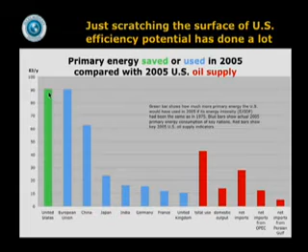In fact, it was also over twice our use of oil. It was about 6 times our oil output or our net imports from OPEC, and it was 13 times our net oil imports from the Persian Gulf. So if we hadn't done that reduction in energy intensity, the world would have been a whole lot worse.

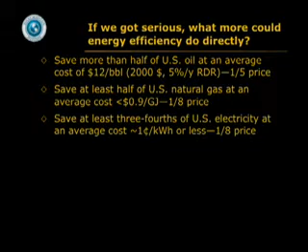And if we got serious, we could, with further technical improvements in end-use energy efficiency, save over half our oil for $12 a barrel, roughly a fifth the recent price, save at least half our gas at under $1 a gigajoule, roughly an eighth the recent price, save at least 3/4 of our electricity at about an eighth the typical price. It's in fact cheaper to do that than just to run a coal or nuclear plant, even if building it costs nothing. We would correspondingly, of course, increase how much we could do with any kind of alternative supply.

We would prolong cheaper options for supply, delay costlier ones. That is, in any form of supply, we'd stay on the lower, easier part of the supply curves. We'd rebalance supply and demand nicely, reduce volatility, gain spare capacity in case of supply interruptions. But indirectly, we'd have some other big benefits. We'd cut and stabilize fuel prices, especially for world oil, but also for gas.

For example, I mentioned 2 nights ago that saving 1% of U.S. electricity, including peak hours, would cut natural gas use by 2% and its price by 3 or 4%. Certainly, any even expectation that the U.S. is about to save oil will soften expected oil demand and price with big benefits, especially for the poor countries that are most stressed by high oil prices, and also big benefits for stability.

It is no accident that with isolated exceptions like Bahrain, the Arab countries that don't have oil have had more development success than the Arab countries that did have oil. We would get better energy services, and that extra value is worth a lot more than the saved energy cost. We would have a richer world, more fairly distributed, and by free market choices, we could, as I'll describe next, solve the oil, climate, and largely proliferation problems, all led by business for profit.

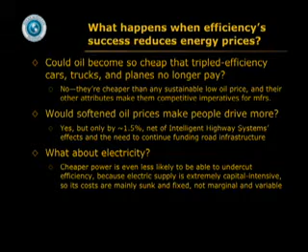Would people drive more when oil gets cheaper because we buy less of it? Well, yeah, but it's a small effect. We figure net it's about 1.5%. What about electricity? Well, cheaper power is even less likely to undercut efficiency because most of the price of electricity is a fixed cost from its extreme capital intensity, and that's already paid for. Not so much of the price of electricity varies if you use less of it.

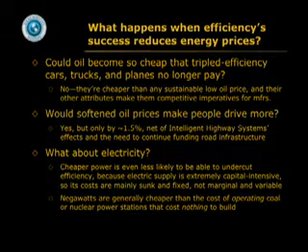And in general, it's cheaper to save electricity than to run a thermal power plant. It really doesn't matter how many of them you have. If it's cheaper not to run them, you shouldn't run them regardless of your capacity position. So these kinds of reequilibration effects in the economy are real, but they're small, and they won't change the outcome that efficiency is still a great buy and will beat supply.

So this suggests that the energy future is not going to be business as usual. On the whole, I think energy prices will become less important. Energy will become less predictable using economic tools and perspectives. And our major energy institutions will become less important to have. Capital is going to move a lot faster, as in many other areas of the economy. The emphasis will also shift from commodities to services, and an economically efficient carbon market will clear at very low prices. In principle, it should indeed clear at negative prices because you can do all of the climate stabilization you need if you really get good at it just with energy efficiency that's cheaper than the fuel it saves.

And the outcomes are going to end up being driven more by the convergence of disruptive technologies and by innovations in competitive strategy than by new public policies, which will always be playing catch-up. Wholly new sources of energy are also possible, and there may be physics we haven't discovered yet, but even without that, just discontinuities and surprises are going to speed up. And also, probably some very bad things will happen.

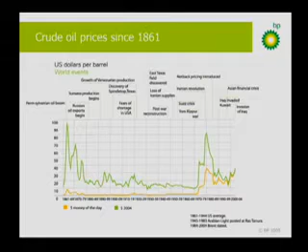What happened was that in 1981, President Reagan came into office believing that the country needed huge expansions of the kinds of big, slow, costly supplies that had not been competing very well in the market. So he greased the regulatory skids, put in huge subsidies, and started to get a big expansion coming online of coal and nuclear and frontier oil and gas, except he didn't notice that meanwhile the market was quietly producing a gusher of efficiency under the twin influence of the Carter-era efficiency-oriented policies that were still working their way through and the 79 second oil shock.

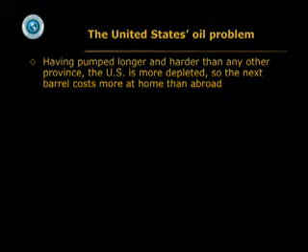Now, the U.S. oil problem is, in essence, very simple. We've simply been pumping oil longer and harder than any other province on Earth, so we're more depleted. So the next barrel costs more at home than it does abroad. And in a market economy, there are only three solutions. Their right names, which are seldom used, are protectionism, trade, and substitution.

Protectionism means that you tax imported oil or subsidize domestic oil or both to distort their relative price so you don't notice that the imported stuff is cheaper. Because the market says buy the cheapest first, politics domestically tends to say buy the nearest first, politics often wins. Of course, it's a little hard to see how you solve the problem of domestic depletion by depleting faster, or as Dave Brower said, strength through exhaustion. And it's particularly dumb to subsidize domestic oil because that also suppresses its efficient use. But we've been doing a lot of that.

Now, trade is another alternative. It just means you unsentimentally buy in world markets oil wherever it's cheapest, just as our competitors do. And you diversify supplies, you stockpile, you cultivate good foreign relations, trade relations, and countries like Japan and Germany that have no oil, of course, are very good at buying it and earning the money to pay for it.

A third option is substitution, and that's really what I've been lecturing about here all week. That's how to do the same tasks by cheaper means than oil, and that offers all of the strategically important plays. The rest are much less interesting and give much less kind of disruptive competitive advantage at the level of the firm or the nation.

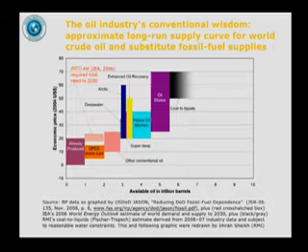Now, just for fun, I spliced into this graph another 3 trillion barrels of oil substitutions from the demand and supply sides that we worked out for the United States in Winning the Oil Endgame, and I reported to you on Wednesday night. And notice how everything suddenly slides to the right when you add those 3 green blocks of substituting some saved natural gas, but not accounting for quite a lot of it. This only counts about a third of it. Doubling end-use efficiency, and advanced biofuels.

And you notice that that makes this very carbon-intensive, expensive stuff slip off very far into the future, and you probably never get there because you're all on renewables by then. So that's one of the examples of why buying time is valuable. And obviously your competitive posture and your investment strategy will be very different if you see that world than if you see this world. So it's important to pay attention to all the competitors in the landscape.

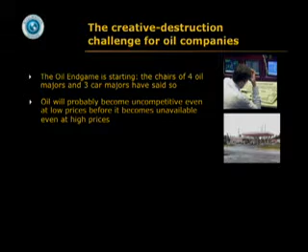Now, the challenge for oil companies is Schumpeterian creative destruction, and the chairs of at least 4 oil majors and 3 car majors have already said that we're starting the oil endgame, and many have added the beginning of the hydrogen era. And I think it's clear to many in the industry that oil is probably going to get uncompetitive even at low prices before it becomes unavailable even at high prices. Or as Sheikh Yamani and others have famously said, the Stone Age didn't end because the world ran out of stones, and the oil age won't end because the world runs out of oil.

Of course, there are important transitional product lines as biofuels are being used in Europe, and there are compelling arguments for switching your business model to providing mobility and access which customers want rather than selling liters, or for the auto industry, selling cars, and to do that before someone does it to you. The most interesting thing, though, that surprised many when we first pointed it out is that if you own a lot of hydrocarbons in the ground, you'll probably make more money even in a world that buys no oil.

And the reason for that is that in general, because you can use hydrogen so much more efficiently than oil, you will make more money out of the hydrogen without the carbon than with the carbon, even if nobody pays you to take carbon out of the air. To put it another way, you'll make more money taking hydrogen out of your hydrocarbons in a reformer than putting more in a refinery. So in a world that is taking this journey beyond oil, your oil asset values may actually be sustained or increased.

Now, let me switch to climate and ask you, how is climate protection like the Hubble Space Telescope?

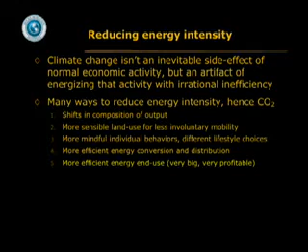Of course, there are many ways to reduce energy intensity once you realize that climate change is not an inevitable side effect of normal economic activity, but just an artifact of energizing the activity in a way that loses money by not using energy sensibly. We can reduce energy intensity and therefore CO2 emissions by changing the composition of output in the economy, by more sensible land use, so you're already pretty much where you want to be and don't need to go somewhere else, by more mindful behavior, mindful markets, different lifestyle choices, and also by technical improvements in energy conversion and distribution and end use, which is the subject of these lectures. But I want to emphasize that all of these are big and important.

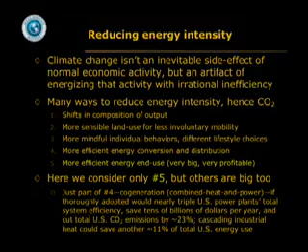For example, just cogeneration, combined heat and power, if thoroughly adopted, would about triple the total system efficiency of U.S. power plants, which have been flat for decades. It would save tens of billions of dollars a year. It would cut America's CO2 emissions by about 23%. Additionally, just using industrial heat several times, cascading it to lower quality uses, could save about another 11% of total U.S. energy use, essentially all from fossil fuel. So those are big terms left out of my end-use efficiency discussion, and they just add more profitable opportunity.

Now, the canonical assumption by most economic forecasters is that the energy used to make $1 of GDP in the world is going to keep falling by about 1% a year. But if we could make that 2% a year, it would stabilize carbon emissions because together with decarbonization of fuel that's happening anyway, it would offset population and economic growth. And if we could boost that to about 3% a year reduction in energy intensity, it would fairly rapidly stabilize the climate and avoid whatever changes are not already irreversibly in train. Could we do that? Well, yeah, actually we have in many years under both high and low energy prices.

California has done about 1 percentage point faster than that and cut its electricity use per person in half and its new house energy use by 3/4 already, and is still improving. China did better than that, cutting energy intensity over 5% a year for over 20 years, then almost 8% a year, till 6 years ago when they temporarily came off the rails. They'll probably get back on around this year. Attentive companies, some of which I've just named, profitably cut their energy intensity 6 or 8% per year. So what's so hard about 2 or 3? And since everyone else makes money on the deal, why should we assume from theory that this is costly rather than learning from experience that it's profitable? Now, I tried to show Monday through Wednesday nights that saving over half our oil and gas and 3/4 of our electricity is very profitable, even against short-run marginal cost.

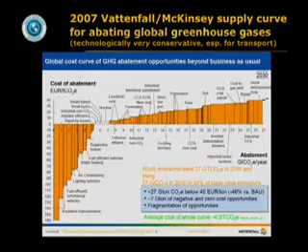Nonetheless, it's interesting that the area under the negative cost part of the curve essentially balances the area under the positive cost part. So according to McKinsey's very conservative assessment, nearly half of the 2030 global greenhouse gas emissions could be abated at an average cost of 1 euro a ton, essentially free, down in the noise. So imagine what you could do with integrative design and modern technologies. It would all be negative cost to abate as much as we need to stabilize the Earth's climate.

In fact, if you imagine an affluent world in 2050, say, with twice as many people as we used to have a decade or two ago, and 3 or 4 times the affluence per capita, that's a 6 or 8-fold grosser world product. But meanwhile, carbon intensity falling as it has done historically by a factor of about 2 to 4 over a half century as we substitute renewables and gas for coal and oil.

And suppose that we got about a 50% gain in conversion efficiency by doing combined heat and power and running power plants better, combined cycle plants and so on. And most of all, suppose that we simply increased end-use efficiency by 2.8 to 3.6% a year. And the U.S. has already done pretty much around the upper end of that range without even trying. And suppose we got anywhere from no gain to a doubling of the human happiness and satisfaction created by each unit of energy services delivered, by getting more services we want, less we don't want, and services of higher quality.

Well, if you do all the math, you find that you could have 1.5 to 12 times less CO2 emission despite a 6 or 8-fold increase in gross world product. That's a lot of flexibility. The future is not fate but choice, and we can exercise that choice profitably over a very wide range.

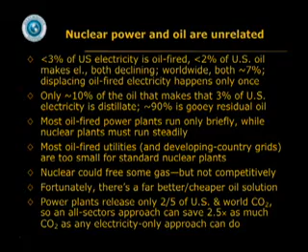And there's just a much better and cheaper oil solution, which I outlined Wednesday night, saving half the oil through efficiency at $12 a barrel, replacing the rest with saved gas and advanced biofuels for $18 a barrel. Now, also, because power plants only release 2/5 of the CO2 from fossil fuels in the US and in the world, an all-sectors approach can save 2.5 times as much CO2 as anything you can do just to electricity.

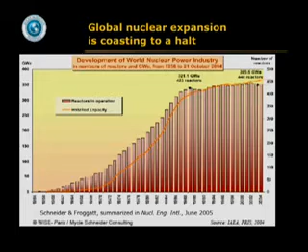But just to pay a little attention to what's happening to nuclear expansion, it is coasting to a halt. Both the installed capacity and the reactors in operation. In fact, I've just put in the latest 2006 data in these little dotted lines. They're right on schedule. Actually, the capacity and output went down a little bit in 2006 because, of course, of basic demographics.

This is kind of an even age stand. There was a great burst of reactor construction, but this is the age distribution of reactors in the world. And they're starting to retire faster than they can be built. So to offset the planned retirements to 2015, 73 not yet planned, plus all the ones now planned, would have to be built. I don't know anyone who thinks that's possible.

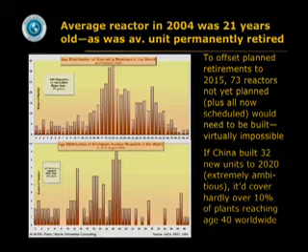If China built all 32 new units that they very ambitiously have announced for 2020, the nuclear bureaucracy being their most powerful one, it would cover hardly over 1/10 of the plants reaching age 40 worldwide, which is the normal advanced retirement age. And therefore, the global nuclear capacity is about to start a long, inevitable decline just from age. This was how it was projected in Nuclear Engineering International in June 2005, and the actual number is a little worse than that little point.

So if you look at the small, slow, we are told, decentralized competitors on the supply side, and you compare them to nuclear net additions, which were projected by the industry to follow this fluctuating line, but this is the actual point for 2006, you find a funny thing is happening. Wind is adding several times more capacity per year than nuclear. So is cogeneration, in fact, many times more when you properly include standby and peaking plants.

Nuclear net additions are comparable to or less than those of geothermal, biomass and small hydro, and in fact, they were nearly passed in 2004 even by the lowly and expensive solar cells. So if you add up all those alternatives, what do you get? Well, the upper graph here shows the low carbon or no carbon decentralized sources of electricity by electric output, and the lower graph by installed capacity compared to nuclear as a black line here.

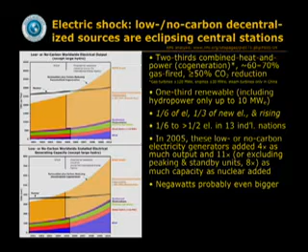And in 13 industrial nations, these micropower sources provided anywhere from 1/6 to over half of all the electricity in those 13 countries. And in 2005, micropower added 11 times the capacity and 4 times the output that nuclear added. Notice this curve is rising rapidly, and nuclear is nearly flat. In fact, in 2006, it appears that the output actually exceeded nuclear's for the first time, and that already happened with capacity back in 2002.

Now, negawatts, electric savings, are not shown in these graphs, but they're probably of comparable size. They might even be bigger. And that implies that micropower plus negawatts now have over half the world market in electrical services. And central thermal stations, whether nuclear or coal or gas-fired, have less than half.

Why is micropower winning in the marketplace? Well, maybe because it costs less and has lower financial risk. This would help explain why it's essentially all financed with private risk capital, while there isn't a nuclear project being built on the planet that is so financed. They're only bought by central planners.

So to test this hypothesis about lower cost, I've been looking at 2 things. One is global investment patterns in clean energy. There's a fellow named Michael Liebreich in London who tracks transaction by transaction, and he found that clean energy investments grew 80% in 2005, 43% in 2006. In 2006, they totaled $71 billion, of which roughly $56 billion was for equipment that provides distributed renewable electricity, up from $38 billion the previous year. That's getting to be a pretty significant market.

And market cap, $154 billion for wind companies quoted on exchanges, $95 billion solar, and so on. $53 billion demand-side efficiency, by the way, and also rapid growth in the relevant market indices in Kyoto ratifying countries, but not in the few that didn't ratify. It's done over 80% better than the NASDAQ or the S&P 500. Not a bad deal. And this is, again, bottom-up transaction by transaction real data.

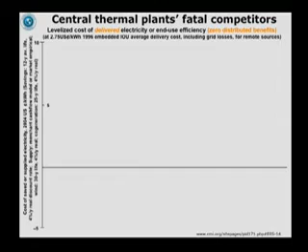And then I looked at the latest empirical data from the United States for what it costs to make or save a kilowatt hour and deliver it to your meter, either from remote resources, which require a delivery cost that I've deliberately stated low, or from on-site resources that are already delivered, so you don't need to pay that delivery cost. Your actual costs may vary, but I've done this on a fair apples-to-apples basis in a way that, if anything, favors central stations. Now, for central stations, I used the canonical MIT study, the best out there, from 2003.

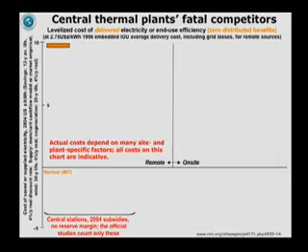It bakes in whatever subsidies central stations already received, which were big. Nuclear was, by most reckonings, around 3 or 4 cents a kilowatt hour subsidy in those days. Several, like 4 or 5 cents, have since been added to that. The reserve margins are not counted, and they concluded that you could send out electricity for about 7 cents from a new U.S. nuclear plant, which means by the time it's delivered to your meter, it would approach 10 cents. They also said that there were uncertainties about this, and in fact, at the latest French price of nearly a year ago, you have to add another cent because the capital cost went up 20% since then.

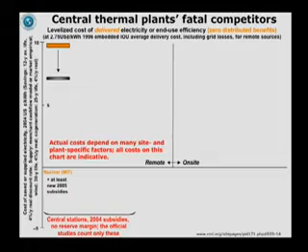But the MIT study also said, well, if we had very large subsidies for initial plants, that could drive down the cost and the construction time and maybe even eliminate the capital market's perceived risk premium. And if we did that, then we'd knock a few cents off the price. Well, we're trying that experiment. Congress took that advice and essentially offered in August 2005 to subsidize the next 6 nuclear plants built in this country, if any, by what's equal to their entire capital cost.

Standard & Poor's, however, promptly put out 2 reports saying this would not significantly improve the builders' credit ratings because most of the risks that the capital market is concerned about are still there. So I think even this heroic effort will have roughly the same effect as defibrillating a corpse. It will jump, but it won't revive.

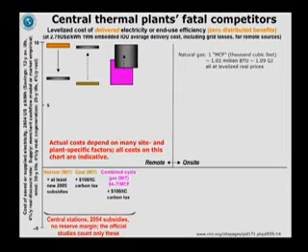Now, if it did work, however, that would get us to nearly the cost of existing coal plants, but if you put on a really stiff, like $100 a ton carbon tax, you could get that up to almost where nuclear was, or the same for combined cycle gas plants. So the folks in Washington keep juggling the taxes and subsidies to try to get the market to give them the outcome they want. However, they may not have noticed that all of these kinds of plants now have less than half the world market in electric services because cheaper things are grabbing that market.

For example, suppose that you take wind farms and you assume that they cost roughly the median that they cost over a recent 6-year period when costs were falling rapidly. In fact, so much so that the cheapest plants were less than half this cost. And suppose you firm up the wind with a backup supply so that it's dispatchable. You can have it any time whether the wind's blowing or not. So it's fully comparable to the central plants.

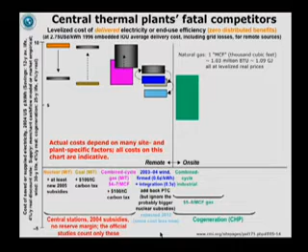And if you took away its production tax credit, you'd go from the blue bar to the gray bar. On the other hand, meanwhile, it's getting cheaper within one power plant lead time. And there are a lot of other renewables that are also clearly competitive because they're selling like mad. Now, cogeneration, whether garden variety or combined heat and power with also cooling in buildings, trigeneration, or recovered waste heat industrial, is even, in many cases, a cheaper option, paying more for gas than utilities do.

And then if you are good at retrofitting commercial and industrial efficiency, that's often around 0 to 1 cent a kilowatt hour, as very detailed data reveal from actual utility programs. If you're not quite as good at it or do a lot of residential shell retrofits, it can cost a few cents a kilowatt hour. If you're very good at it, through integrative design, as described earlier in these lectures, you can often make it go to a negative cost.

If you just sort of stand back and squint at this graph, it's pretty obvious the stuff in the upper left costs more than the rest of it, so you would expect that to be selling slower, and that's exactly what's happening in the world market. But this has a very interesting implication for climate change. I can take 10 cents, more or less, and invest it in a new delivered nuclear kilowatt hour. And I don't care whether the right number is 10 or 15 or whatever. The point is, it's a big number. So I will only get 1 kilowatt hour of coal-fired power displaced for my dime, if I'm lucky.

But if I spent the same dime buying something cheaper, this other stuff, I would get 2 to 10 times more carbon displacement because I get more of the other stuff. That's what cheaper means, right? So if you buy something expensive instead of something cheap, you get less of it, and you also get it slower because nuclear builds slower than a lot of these distributed technologies that are distributed in market actors and have very short lead times. And you know, if climate is a problem, we ought to be investing judiciously, not indiscriminately, and we ought to buy the most solution per dollar and the most solution per year.

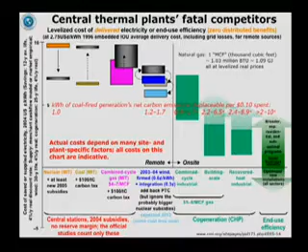If we buy something else, we're making the problem worse than it should have been. That's called opportunity cost. You can't buy 2 different things with the same dollar at the same time, and if you buy one, you can't buy the other. For some reason, this rather important point has never been reported, as far as I know, in the financial and business press.

Now, just as a little update, nuclear capital costs and fuel costs are going through the roof. The pre-MIT studies simply quoted the industry's hopes and wishes and quoted each other. There wasn't really honest empiricism until the MIT study. And that evidence-based study derived roughly $2,000 a kilowatt. Some U.S. utilities are now getting much higher numbers. And it's interesting that historically, if you look at a ranking Jonathan Koomey and his colleague Dr. Hultman have done for all the 99 U.S. plants built, you find you'd have to be down among the very cheapest ones for the MIT All Goes Well or the University of Chicago study or the industry's claims to be valid.

8 recent Asian plants look way off the scale. They look to end up around $4,000 a kilowatt, somewhere up in here. Before recent construction cost escalation, the construction cost indices, given especially the Chinese run-up in demand for concrete and steel, have just been standing up on end lately. And meanwhile, there are looming fuel crises in nuclear, which always thought it had cheap fuel. And Jim Harding showed in a recent Euratom anniversary paper for the European Parliament that this would probably roughly double, triple, quadruple, maybe 7-fold increase, who knows, the nuclear fuel cost, depending on whether you require a very costly and silly thing called reprocessing.

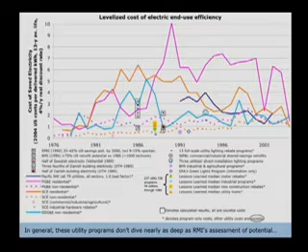And in general, those utility programs don't dive nearly as deep as RMI's assessment of potential savings. That is, they tend not to do integrative design or the latest technologies. Nonetheless, in 1989 and 90, and in a joint Scientific American paper, the Electric Power Research Institute and Rocky Mountain Institute published their respective supply curve estimates.

Actually, the EPRI curve doesn't show an extra 9 to 15% savings that they expected would happen anyway. 50% of use is up around here. So although the definitions are slightly different, these are both big, cheap savings, and it turns out the difference between them is essentially all methodological rather than substantive.

The RMI estimates are based on measured cost and performance for about 1,000 technologies, very thoroughly documented in a bookshelf we wrote back in the late 80s, early 90s. And it was retrofittable technologies that could save about 3/4 of U.S. electricity at, in today's dollars, about 1 cent a kilowatt hour.

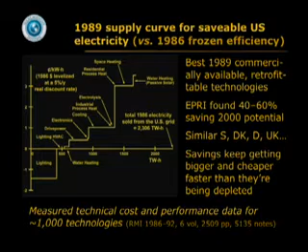Similar results were found by very detailed independent assessments in Europe, especially in more efficient countries. And of course, the savings have since, as EPRI will agree, gotten bigger and cheaper faster than we've used them up.

I want to dig a little more into distributed generation by asking what's the right size for the job in supplying electricity. For the first century of this industry, power stations were costlier and less reliable than the grid. So it made sense to build a number of big stations and back each other up through the grid. But the last 20-odd years, that stopped being true. Power plants are now cheaper and more reliable than the grid.

So if you want really cheap and reliable power supplies, you need to make the power at or near the customers. That's what distributed power is about. And the market has recognized the gradual supremacy, the emerging supremacy of distributed generation as various benefits we were getting from central plants saturated and even reversed.

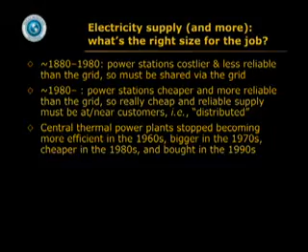And that is why so many countries, including some very considerable industrial powers, now get a substantial fraction of their electricity from distributed resources, the ones that we are told are slow, small, uneconomic, and won't do much for decades.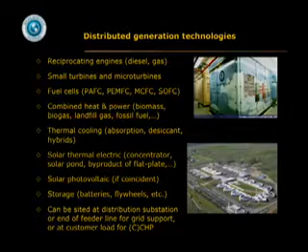There are many technologies of this sort: engine generators, small turbines, microturbines, 4 flavors of fuel cells, all kinds of cogeneration from various resources, some of which are carbon-free or carbon-negative, heat-based cooling systems, solar thermal electric, solar photovoltaic, also storage technologies and the ability to scatter the stuff around the grid where it will do the most good.

And the EPRI vision, which I think is a very nice one, of utilities' emerging distributed resources portfolio, has things like solar cells on your roof, wind machines, probably not on your roof, but maybe off in the backyard, or down the street or off in the bay on the delta.

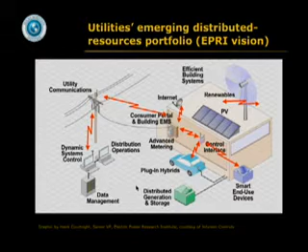Smart end-use devices, all kinds of controls and communications, plug-in hybrid cars exchanging power with the grid, distributed commercial and industrial generation and storage, and dynamic operations of the grid. So this is all the stuff out at the customer end, and it can gradually come to dominate the grid. And of course, the progress has been quite impressive.

And interestingly enough, just in California, if you add up, say, wind and solar at reasonable capacity levels, because the solar's mainly in the daytime and the wind's mainly at night, their sum in the right proportions beautifully matches the load shape. Wind power has 74 gigawatts installed worldwide through the end of 2006, growing 32% a year.

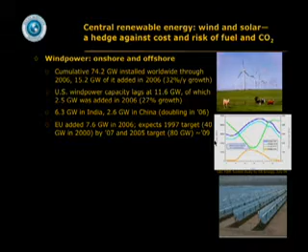The US lags, but is now doing a lot again. Quite a lot coming on in India and China. India is actually ranked 3rd or 4th in the world in the rate of adding wind power. Germany and Spain are each adding each year more wind capacity than the world adds nuclear capacity. Europe is expecting to beat its wind targets handily.

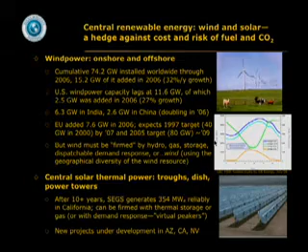Wind can be firmed up by conventional generation, hydro or otherwise, by storage, by dispatchable demand response, or of course by other wind machines somewhere else where the wind is blowing. Central thermal electric power also works very well, the troughs in the desert, for example, and new projects are under development now in at least 3 states because the economics are so good.

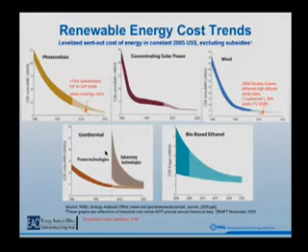Renewable energy costs keep going down, and there are many examples of breakthrough technologies that one or another inventor thinks that they can bring on that go well below the conventional cost projections. But there's also an analytic revolution that changes the game. And that's an Economist book of the year summarizing it called Small is Profitable. You can get that at smallisprofitable.org. We published it in 2002.

And it organizes 207 so-called distributed benefits, hidden economic benefits of making electrical resources the right size, typically increasing their economic value by about a factor 10, although the exact numbers are very site-specific. And this approach can apply to many resources like fuel cells. It can make handmade fuel cells at high handicraft prices cost-effective right now in many uses if you put them in the right place, use them in the right way. The same for solar cells, the same in spades for demand-side resources, although the book was mainly about supply.

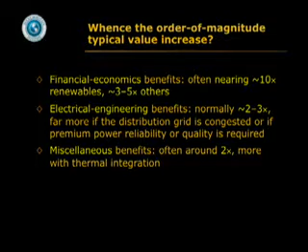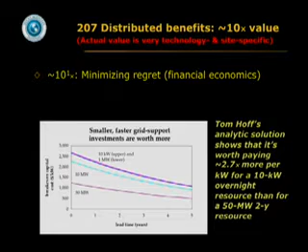Where does this big tenfold or so value increase come from? Well, the biggest benefits come from financial economics, which often increase value by about an order of magnitude on their own for renewables, half that for non-renewables. The next biggest category are electrical engineering benefits that normally increase value by about a factor 2 or 3, but a lot more if you have a congested distribution grid or you need premium power quality. Then there are about another factor 2 worth of miscellaneous benefits, more if you can use waste heat, and I'm not even counting externalities.

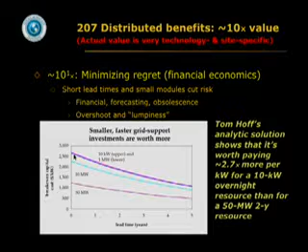For example, financial economics, the tools used to analyze financial portfolios, provide you with nice ways to minimize regret at what you did you wish you hadn't or what you didn't do you wish you had. For example, Tom Hoff has done a closed-form analytic solution saying that if you're going in typical conditions to put a generator at the substation to support it on the peak hour loads in the hot afternoons, if you were willing to pay, say, $1,000 a kilowatt for a 50 megawatt generator that took 2 years to install, you should be equally willing to pay $2,700 a kilowatt, 2.7 times as much, for a 10 kilowatt generator that you can install over the weekend, because they will have identical financial performance. In other words, small, fast stuff is more valuable than big, slow stuff, and it's worth paying more for to get the same financial performance.

You can also redeploy those resources. You put them where you think they'll do the most good, but if the system evolves in a different way than you expected, you can take them down, stick them on a truck, and put them where you wish you had. So you're more likely to get bigger expected benefits, double whammy. You get rapid learning and mass production economies of scale. And of course, renewables give you a constant price. Once they're installed, they're not subject to fluctuating, say, natural gas prices.

And that can roughly double the present value you have to count in a cost stream for a gas-fired generator when you're comparing it with a wind generator, which doesn't have price volatility. So that means the wind generator is worth probably 1 or 2 cents a kilowatt hour more than you thought. And utilities are just starting to use those risk-adjusted discount rates, which any first-year MBA student knows about. We didn't do that in the first $1 trillion or so of utility asset acquisitions.

There are also good reasons that come out of portfolio theory why you should buy a substantial fraction in renewable resources, even if they cost more. It's the same mathematics and reasoning that says you should have some riskless treasuries in your financial portfolio, even though they yield less, because they'll improve overall risk-reward ratio.

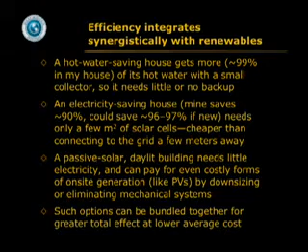A passive solar daylit building doesn't need much electricity, and it can pay even for things as costly as solar cells by downsizing or eliminating mechanical systems. And if you bundle those kinds of efficiency or renewable options together, you get greater total effect at lower average costs, as in the 4 Times Square building in New York, where a 40% energy saving was able to downsize the mechanicals enough for putting in fuel cells and shell-integrated photovoltaics on the south and west spandrels at no extra cost.

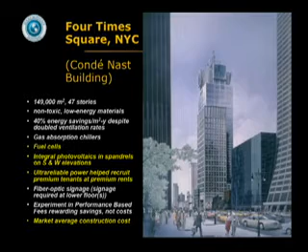So they were able to recruit premium tenants at premium rents, partly because it's such a pleasant daylit space, and partly by saying, well, don't worry if something goes wrong with the power supply. We have the 2 most reliable known power plants right in the building. And the total construction cost came in exactly at market average, but the market performance is a lot better.

Here's a California example. You know, we build a lot of jails, and here's one in Alameda County, Santa Rita Jail, which happens to have 3 acres of photovoltaics added on the roof, but first they made the roof white to reject solar heat and made the jail more efficient in its air conditioning, lighting controls, so that on the hottest afternoons, when the solar cells are cranking out the most power, the jail isn't using very much, so it has the most surplus left to sell back to the grid at the best price.

And that means it pencils out even without state subsidy. As it is, a $9 million project received $5 million of that back from the state for the efficiency, load management, and photovoltaics, but it would have worked even without it because the gross savings were $15 million. And they easily beat the county hurdle rate. Well, if that worked for solar cells, it will work for any other kind of micropower that's even cheaper.

Of course, there's always a risk that whatever option you buy, it won't work. You'll have a dry hole. So what can we learn from actual market behavior about that? Well, in California from 1982 to 85, we had a pretty level playing field in letting supply and demand side options compete at fairly equal subsidies. At that time, the state's peak load was about 37 gigawatts.

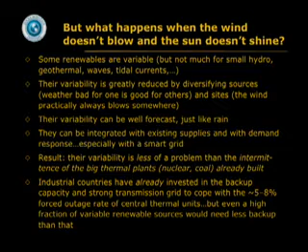And you can forecast variability. We call it weather forecasting. It works very well. We do that for rain now in hydro systems. You can also integrate these variable resources with existing supplies and with demand response, especially if you have a smart grid. And when you add all that up, the variability of solar and wind power turns out to be less of a problem than the intermittence of the big thermal plants that we already built, because we've already bought more backup for their tendency to fail completely from time to time than we would need to handle even, say, a very large fraction of wind in the grid, and you only need the backup once.

Energy security then raises that other set of questions, and I think we need to be careful of the fallacy of saying baseload plants, meaning big thermal plants. Baseload has other meanings in utility economics that lead you to quite a different conclusion. Now, if I were to tell you that a lot of people make phone calls, so we need huge telephone exchanges full of relays and copper wire, you'd say, where have you been lately? We do a lot of that now with distributed packet switching.

Or if I said many people use computing services, we need more giant supercomputer centers where you come submit your job to the high priest who will run it on the machine and tell you the result. You'd think I was barking mad. No, we do that stuff with network PCs now for the most part. And yet we still have the same mentality in the power business, even though a 1,000,000 kilowatt unit or 1,000 1 megawatt units or a 1,000,000 1 kilowatt units all send out the same electricity.

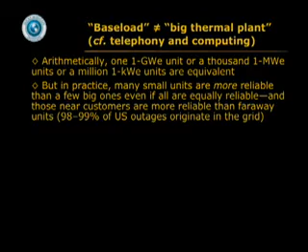But in practice, many small units are actually more reliable than a few big ones, even if they're all equally reliable per unit. The reason is that the small ones don't all fail at the same time, and they are closer to the customer, but 98 or 99% of power failures originate in the grid. So if you bypass the grid and your power is local, you're a lot less likely to have the lights go off.

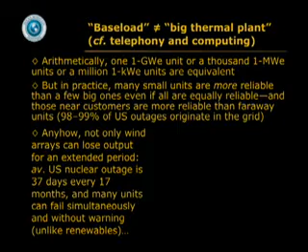And by the way, thermal plants are not at all immune to losing power on a large scale for an extended period. The average nuclear plant shuts down in this country for 37 days every 17 months, usually for refueling. But also you can have many units fail simultaneously without warning. Renewables don't do that. For example, in the Northeast blackout in 2003, we had 9 U.S. nuclear units in the Northeast that were working beautifully, 100% output. When the blackout came, they all instantly turned off. They have to for safety reasons.

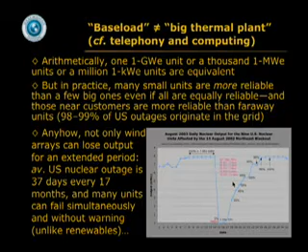But then because of nuclear physics issues like xenon and samarium poisoning, you couldn't start them right back up again. They were guaranteed unavailable when most needed. This is an anti-peaker attribute. And it took 2 weeks to get them back. Over half the capacity was out for 12 days. That's not a desirable attribute for energy security. And in fact, if you look at the world after 9/11, you remember about the importance of resilient system architecture.

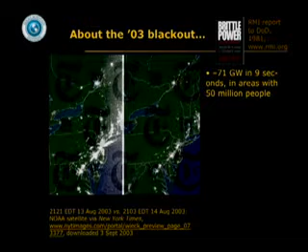The lights were routinely on 10 August 96. 35 seconds later, after some bad things happened in Oregon involving a tree limb and operator mistakes, 4 million unhappy campers in 9 western states and parts of Canada. Or in the August 2003 blackout, 71 gigawatts went dark in 9 seconds in areas containing 50 million people. But notice what stayed on, not just what went off.

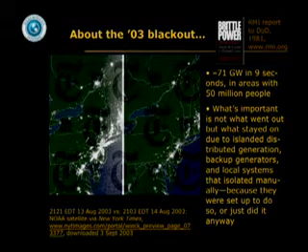There were a lot of islands of light out there that had islanded distributed generation. And either they were set up to be able to cut loose from the grid and keep running, or they just did it anyway and broke the rules. And a lot of them were things like hospital backup generators, municipalities where a smart operator said, I don't like what's coming at me, I'm going to get out of this, and I have enough supply to run my demand. And there are ways now to prevent blackouts at a profit. The major failures that through accident or malice are now inevitable by design can be made impossible by design.

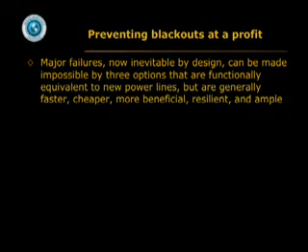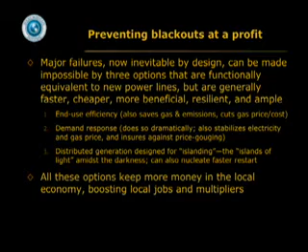End-use efficiency, demand response that can also insure against price gouging and stabilize electricity and gas price, distributed generation designed for islanding and able to nucleate faster restart if it happens that you have a big blackout. All those options are cheaper, faster, more beneficial, more resilient. They're ample to do the job. They're a lot cheaper than, say, new power lines and power plants that actually make the problem worse, and they keep more money in the local economy.

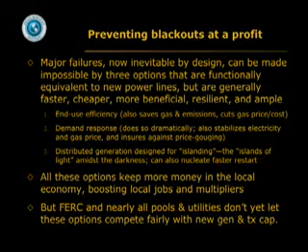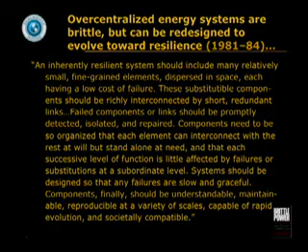Unfortunately, our federal government that decides where to build power lines is still not allowing these options to compete fairly, neither are power pools in general, but I think that will change. And we can redesign over-centralized energy systems toward resilience. I did a study on this for the Pentagon back in the early 80s and described the design elements of a resilient system that makes major failures impossible. This description will be familiar to any of you that do resilient systems engineering in electronics, in military, in aerospace, and so on.

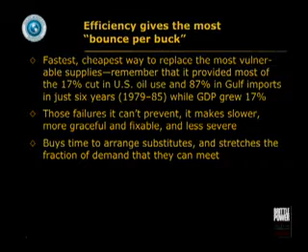And exactly the same criteria apply in energy. They make sense, they make money. Efficiency among those options gives the most bounce per buck because the failures it can't prevent, it makes happen slower and more gracefully and more fixably. It buys time to arrange substitutes. It stretches the fraction of demand they can meet.

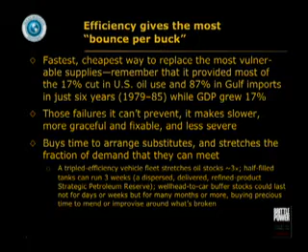For example, if you have a tripled efficiency vehicle fleet, it'll triple your oil stocks effectively. And the half-filled tanks of those vehicles can run you around for 3 weeks. It's like a distributed strategic petroleum reserve. And the wellhead-to-car buffer stocks could last not for days or weeks, but for months to buy time to fix the system or improvise around it. Electric efficiency does the same by stretching the effect of distributed resources.

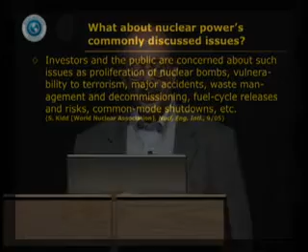Just a word about nuclear proliferation. There are a lot of issues around nuclear power that investors and the public are concerned with. And this is, by the way, a summary by a major advocate of nuclear power. Of these, I would say that proliferation of nuclear bombs and vulnerability to terrorism are serious issues and quite intractable issues. But notice that I've considered economics first.

So those kinds of issues are not a minor counterweight to enormous advantages of nuclear power. They're rather a gratuitous supplement to its enormous disadvantages. And if nuclear power is, as I think the evidence shows, unnecessary and uneconomic, we don't need to debate whether it's safe. We just shouldn't do it. So its market failure, its dying of an incurable attack of market forces around the world, is a good thing for climate and security.

It frees up money and attention for better alternatives, which, as it happens, takes about 10,000 times less capital than expanding the supply of electricity. 1,000 times less capital per kilowatt for efficiency than for new power plants and grid, and you get your money back 10 times faster. Intensity times velocity is 4 orders of magnitude capital saving, but the power sector eats a quarter of the world's development capital. So you could reverse that and turn the power sector from a black hole for capital into a net exporter of capital to fund other basic development needs.

You get, as I described earlier, 2 to 10 times more climate solution per dollar, and you get it faster from micropower and negawatts than from, say, nuclear. And also, if you recognize what the market's done to nuclear power, you're stopping the main facilitator and the main source of innocent-looking civilian disguise for the spread of nuclear bombs by countries like Iran and North Korea. Because it's really nuclear commerce that makes widely available in innocent guise all of the key ingredients for do-it-yourself bomb kits. Without nuclear power, those ingredients would be harder to get, more conspicuous to try to get, and politically much costlier to be caught trying to get or supply, because there'd be no ambiguity about it anymore.

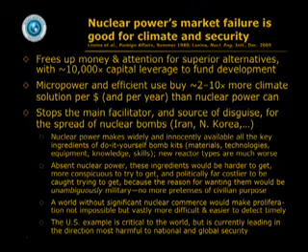The reason you want them would be unambiguously military, and you couldn't pretend, as Iran does, that we're just making electricity. So a world without significant nuclear commerce would make proliferation not impossible, but a lot harder, and easier to detect timely because we could focus scarce intelligence resources on needles, not haystacks. Obviously, if a country like ours, with all of our financial wealth, technological prowess, and fuel resources, says we can't make it without nuclear power, that sets a very bad example for everybody else without those advantages. And I'm sorry that our country is currently leading in the direction most harmful to our security.

In fact, the biggest threat to our energy security is our national energy policy. It perpetuates our expanding oil dependence in many ways. We thoughtfully bailed out the bankrupt Iranian and nearly bankrupt Saudi treasuries and empowered Ahmadinejad and Chavez and Putin. These are folks of our own creation, essentially. We're funding both sides of the war and losing a lot of moral stature in the process, and as Secretary Rice says, warping our foreign policy and various diplomatic postures and attitudes, weakening the competitiveness of our economy and making ourselves more vulnerable and fragile in many ways.

But also, our energy policy strongly favors the over-centralized system architecture that showed up in Hurricane Katrina, for example. I had said in Brittle Power that a handful of people could turn off 3/4 of the oil and gas to the eastern United States in one evening without leaving Louisiana. Sorry if Katrina read that. And electricity, where we're finding regional blackouts getting more frequent and more intense, and our response to that is to do exactly the things, building more big power plants and grids, that make regional blackouts more frequent and more intense still.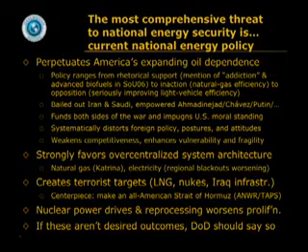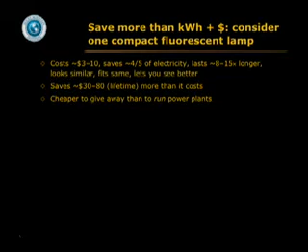Finally, a little on global development. Think about a compact fluorescent lamp. It costs a few bucks. It saves 4/5 of the electricity used by an incandescent lamp. It lasts many times longer, looks the same, fits the same. There are many, many kinds, over 1,000 kinds on the market. You see better with it. You can screw it in yourself. It saves tens of dollars more than it costs. It's cheaper to give away than to run a thermal power plant. It keeps out of the air over its lifetime about a ton of CO2 and other bad stuff.

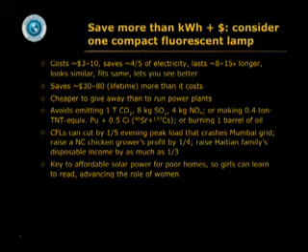You can use compact fluorescents to cut by a fifth the evening peak load that crashes the grid in many developing country cities. You can use it to raise the profits of a North Carolina chicken grower by a quarter, or to raise a Haitian family's disposable income by maybe as much as a third. It's the key to affordable solar power for poor households, where, for example, with such light, girls can learn to read, advancing the role of women enormously.

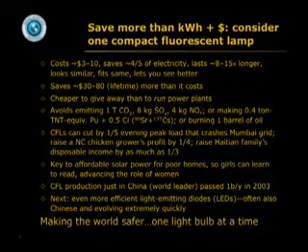China is the leading producer. They passed 1 billion units a year in 2003. Next thing, even more efficient light-emitting diodes, often also Chinese, evolving very rapidly, make solar power even cheaper to bring light to the world. So we can make the world safer one light bulb at a time, and you really can get it down at the corner shop and screw it in yourself.

Leapfrog development, I think, can emphasize lighting and cooling to free up capital for other development needs through that 10,000-fold capital leverage that I mentioned a minute ago. And in fact, more broadly, advanced resource efficiency is the cornerstone of the development process, because otherwise the supply side eats the budget and you don't have enough money left to build the things that were supposed to use the energy.

There was a famous episode in China told to me by a member of the State Council where China bought over 100 refrigerator factories to increase the ownership of refrigerators in Greater Beijing from a few percent to over 60% in just 6 years. They thought that was a really successful project, except the units were very inefficient. And this caused shortages of power and capital. So they learned from that they can't afford to develop unless they do it efficiently the first time. A very important lesson.

So, as Jørgen Nørgård in Denmark says, by systematically pursuing the kind of advanced energy efficiency potential I've described this week, it's possible over a half century to offer everyone on Earth a joyful and materially decent life with a per capita energy consumption only a small fraction of today's consumption in the industrialized countries. That's a worthy goal. It's a feasible goal to have enough for all, forever, taking nothing, wasting nothing, doing no harm. The practical keys to doing this come from design.

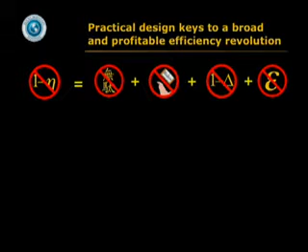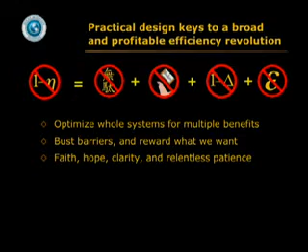To get no inefficiency, we need no muda, no waste, purposelessness, and futility, no rules of thumb, no infectious repetitis, no incrementalism. We need to optimize whole systems for multiple benefits, bust barriers, reward what we want, commit ourselves to faith, hope, and clarity. The greatest of these is clarity, and relentless patience to push through changes that take a half century.

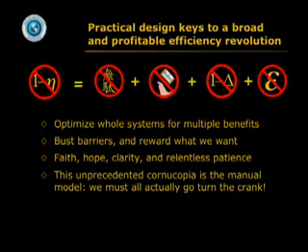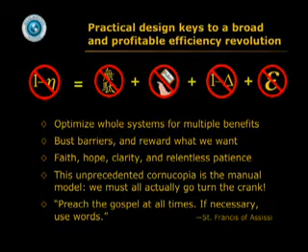This cornucopia that I've been describing to you this week is the manual model. We do actually all have to go out and turn the crank. And as St. Francis of Assisi said, preach the gospel at all times. If necessary, use words. There's a lot of practical work to be done as well. The central paradox here is that to think outside the barrel, we have to unlearn a lot that we thought we knew.

We can capture enough efficiency to solve many of the world's biggest and most dangerous problems at a profit, because most of the world's energy is wasted, and the amount that's wasted that we could recapture and turn into profits keeps getting bigger and cheaper, but most people don't know this yet. Many even deny it on principle. This is a big barrier to action. You can't do something you don't think exists or is possible.

So the biggest and cheapest and fastest and most benign energy option we have remains the most invisible, misunderstood, ununderstood, and neglected one. And yet, I dare to think we can change this, partly because the search for intelligent life on Earth is turning up promising specimens. You see, brains are evenly distributed, one per person, so they're mostly in the South.

Half of them are in the heads of women, and many people who have not had much voice in the global conversation are getting hooked up to the emerging global nervous system, starting to have more voice, contribute their ideas. This is good for a lot more, you know, than spreading darkness with the speed of light. Because as far as we know, there's nothing in the universe so powerful as 6 billion motivated minds wrapping around a problem. So I think there's a huge potential here for south to north discovery, leadership, teaching, if we in the north have the humility to listen.